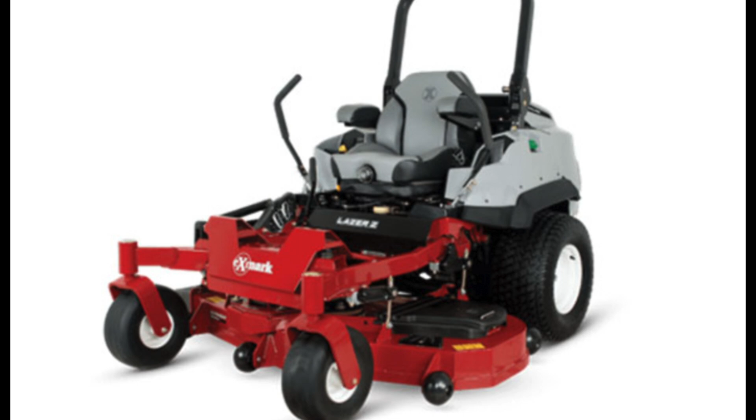Today we're looking at the drive system for a riding mower. Some parts for this system include internal gear pumps, fans, a fluid control device, and a dead bird.

This machine was actually scrapped because it ate a bird. That bird's name was Pete, and he's graciously donated part of his afterlife to help us explain the system. Pete's hoping that studying this lawnmower will help him find peace and move on to the other side.

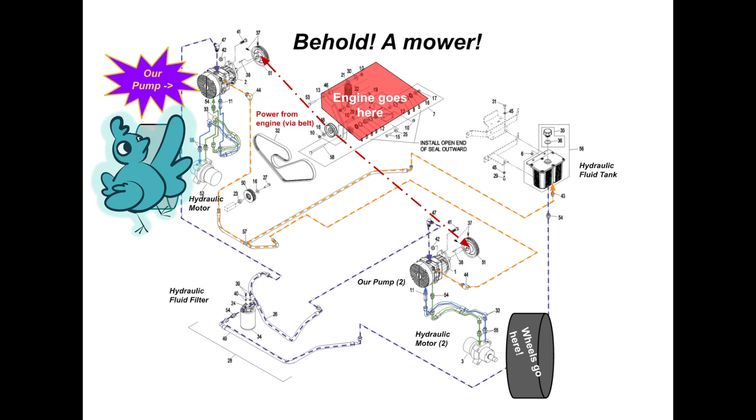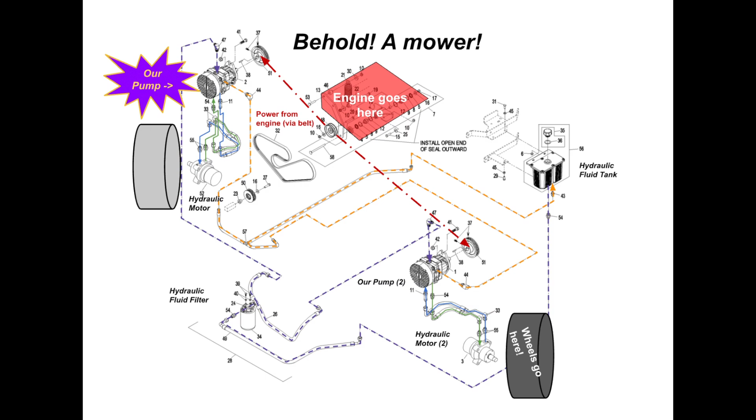Here's a diagram of our system. The engine powers the pumps, which cycles hydraulic oil through the hydro motors to turn the wheels. There's actually two pumps in each of these diagrams. There's a primary pump that does most of the work, and an internal gear pump which pushes oil into the casing of the primary pump at high pressure. This helps it avoid cavitation and run efficiently, as well as cycle fresh hydraulic fluid into the pump from the tank, which it pulls through a filter.

Pete, which of these systems would you like to study in more detail? Alright then, internal gear pump it is.

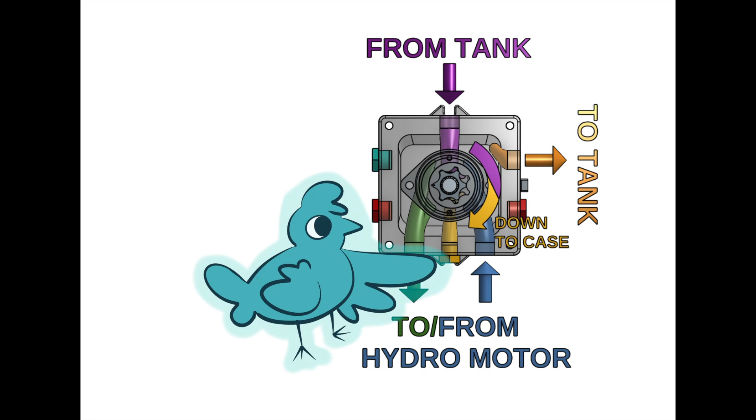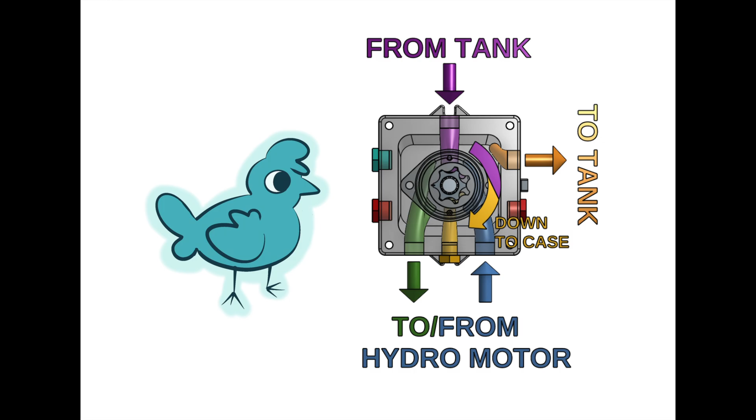The internal gear pump is connected to a funky fluid control device, illustrated here. The arrows show the direction the fluid is moving. What's happening here is that the pump is taking fluid from the tank and pushing it into the casing. The other pump then sends it to and from the hydro motor in a loop. The lawnmower can be reversed and forwarded quickly by changing the direction of this flow, meaning no complicated gear trains. Meanwhile, fluid is slowly exiting the casing through a constriction at the same rate it's shoved in by the gear pump. All the pressure it generates is actually from resistance in the system. The volume of fluid in the casing is constant, so it must reach high pressures to satisfy conservation of mass.

Pete, you feeling any better yet? Would seeing the gear pump move help?

Alright, on to the math. Let's start with specific speed and diameter. From our pump measurements and some performance specs, our specific speed is 7.51 times 10 to the minus 3, and our specific diameter is 0.276.

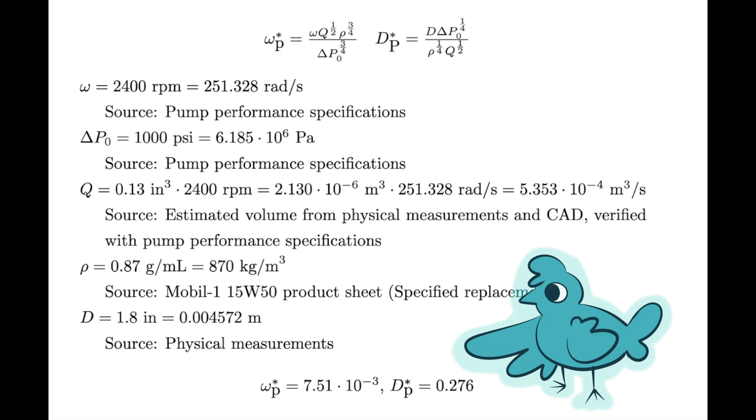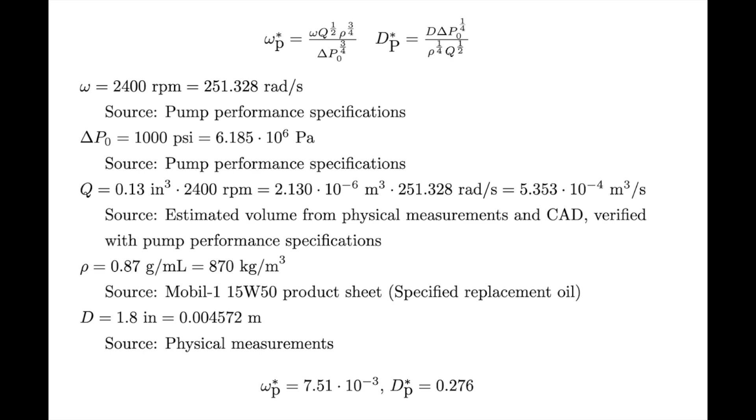The main model we utilize here is the continuum model, as it lets us use pressure instead of collisions for every atom. As you can see, the specific diameter is pretty typical for a centrifugal pump, but the specific speed is very low. This indicates that the necessary pump for our intended purpose produces a very high pressure at a very low flow rate. There are no turbo machines that will operate efficiently in these conditions. This means that a positive displacement pump is the better choice and validates the usage of such a pump for this application. There are still a few types of positive displacement pumps that could be used in this situation.

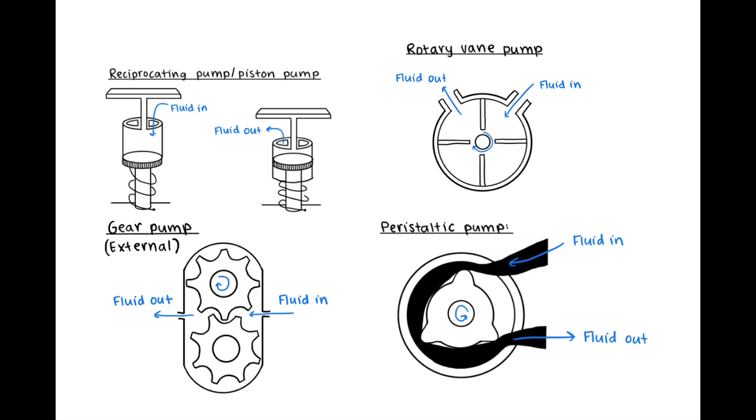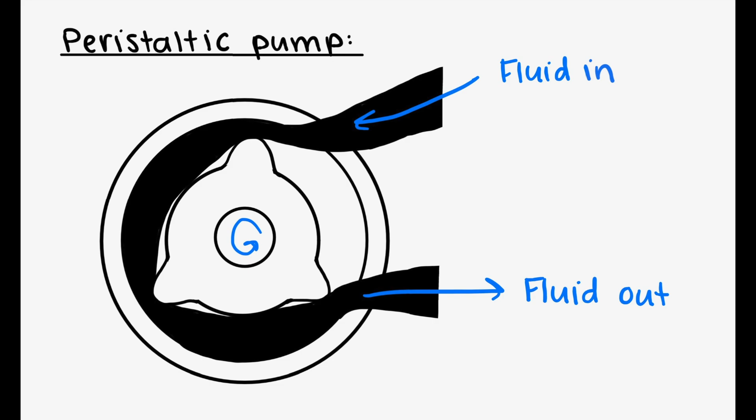So out of all the options, why use a gear pump? Well, piston pumps aren't great because they have lower efficiency, and the flow rate isn't constant. Because of the constant pushing of the piston, the flow through the pump pulsates. Peristaltic pump is higher risk since the friction against the tubing inside makes it prone to leaking and ruptures. They are very unsuitable for higher RPM applications and would likely fail at around 2400 RPM rotation as expected of the pump in our application.

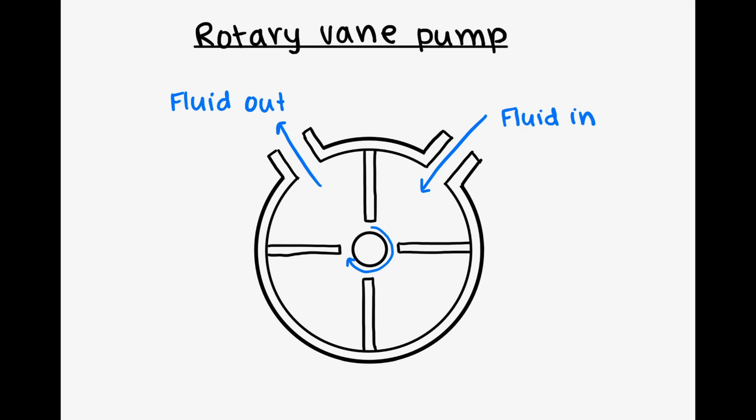Rotary vane pumps work much better for lower viscosity fluids, and we're using motor oil, so it wouldn't exactly work here. So gear pump is ideal. It works better with high viscosity and high pressure fluids, which is exactly our situation. It provides a relatively steady flow for use in the rest of the system as well.

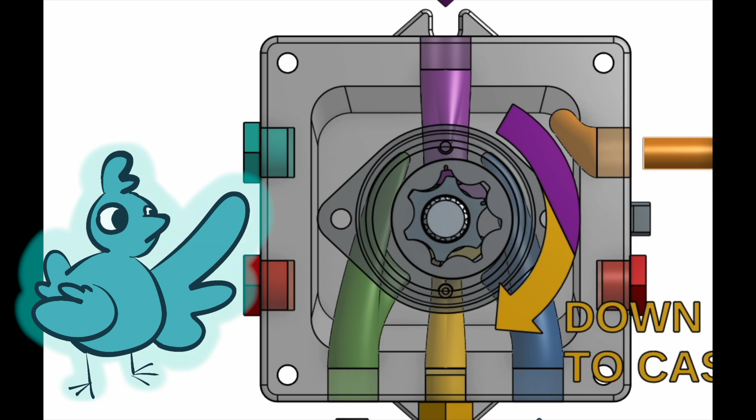So the next question is internal or external gear pump? Well, internal gear pumps are much less temperature sensitive than external gear pumps because they have larger clearances, so more room for thermal expansion. The higher clearance also makes internal pumps better for high viscosity fluids like motor oil. The oil in our pumps sees a huge fluctuation in temperature, from -23 to 90 degrees Celsius according to the spec sheet. This means that an internal gear pump is a better choice for this application.

Our final piece of analysis is the Reynolds number. The Reynolds number is equal to rho UL over mu, and basically is a measure of how turbulent the flow is. We also take advantage of the mean flow approximation to calculate U. Using the area average speed is very helpful since we're dealing with weird areas. Mu is found using kinematic viscosity times density, which are both in the spec sheet.

The final number is 108.75 kilograms per meter second. Rho equals 870 kilograms per meters cubed, also from the spec sheet. U and L are a little funky because the gear is moving. For L, we took an average from the minimum to maximum length, which was 5.334 millimeters. For U, we use the equation U equals Q over A, with A being the depth times that area average length we just calculated. Q is specified in the spec sheet. Putting all of this into the equation for the Reynolds number, we get 0.0866.

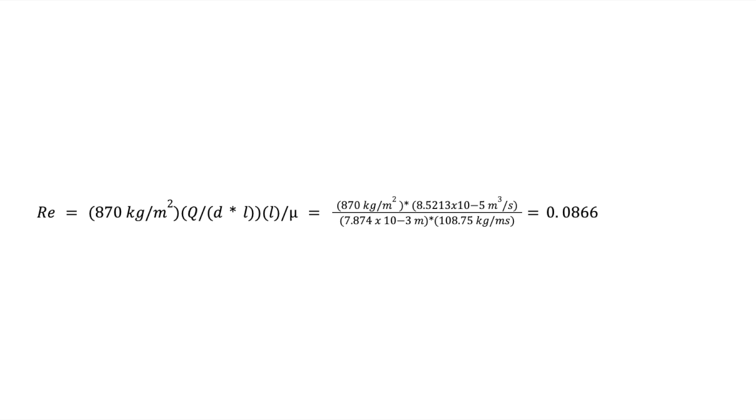That's pretty low. This means that the Reynolds number approaches 0, so it's reasonable to assume it's laminar flow. This validates our streamlines, which will remain valid up until a Reynolds number of about 500, which is when it exits the laminar regime. This number was found with the highest rated speeds for the system, making the actual working range between 0 and 0.0866, so our laminar assumptions are valid.

To analyze this further, we could use the Stokes equations, since we meet the requirements for it. However, we're almost out of time, and Pete is very frustrated by the math, so as any good lecturer will do, we'll leave this as an exercise to the viewer.

Pete, has this helped you find closure and move on? Pete, what you got there? Well, I guess that's one way to find inner peace.